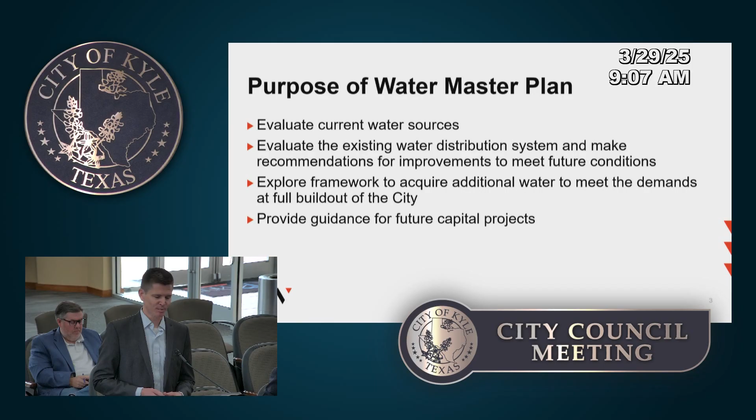So as part of this project, our team evaluated the city's current water sources, evaluated the existing water distribution system, which led to recommendations for improvements to meet future conditions. Also explored the framework to acquire additional water to meet the demands of the city at future build-out. And then the final section of the Water Master Plan is to provide guidance on future capital projects.

Wanted to quickly summarize a project timeline. Our team received a notice to proceed in March of 2024, about a year ago, and there were several concurrent activities that took place over the last year. Our team developed a citywide hydraulic model to essentially mimic the city's water system. That included field calibration and coordination with city staff to make sure that the hydraulic model and the city system were operating in alignment so that we could accurately predict what was happening.

Worked with planning and development teams at the city for development of the water demand projections. We assessed current, planned, and potential future water supply sources. And that led to the development of a capital improvement plan and a water master plan. And that draft document is what was included in the council materials today. So today we'll be walking through the general evaluation and findings that are included in that draft report.

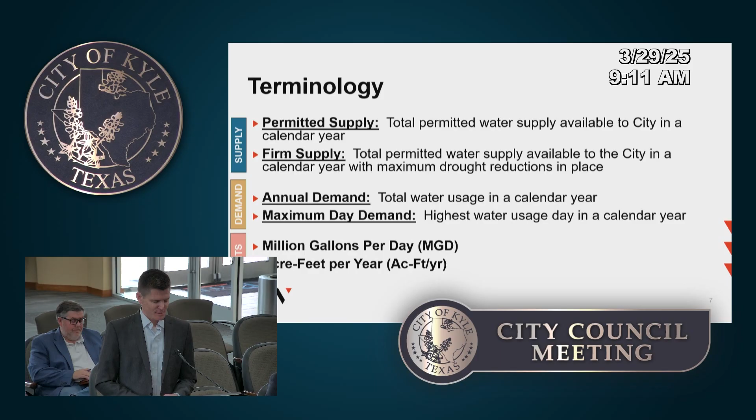Next, the units. We'll be mostly focusing in this presentation on million gallons per day. There's also a unit of acre feet per year. This is a common unit that's used in water supply planning and water permits, but for the purposes of consistency, we'll be looking at annual and max day throughout the presentation in terms of million gallons per day, or MGD.

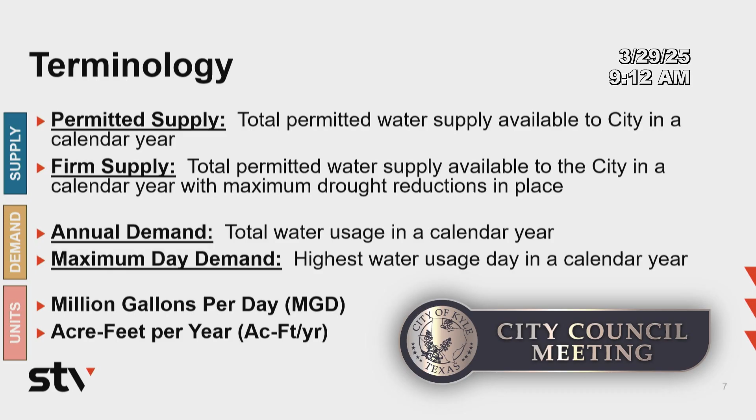In just over a month, I believe early May, the ARWA Alliance Phase 1B project is scheduled to be online. That project will deliver an additional 1.73 million gallons per day of firm supply. Then as additional phases of the Alliance project come online, anticipated Phase 1C, 1D project in 2027, as well as the Phase 2 project in 2032.

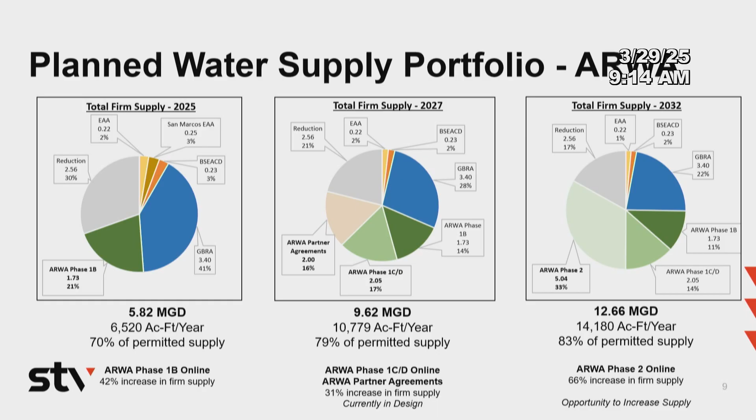Over time, in 2027, the firm supply increases to 9.62 million gallons per day, and in 2032 increases again to 12.66 million gallons per day. One important thing to note as these pie charts progress is as more Alliance supply comes online for the city of Kyle, the amount of potential drought reduction decreases.

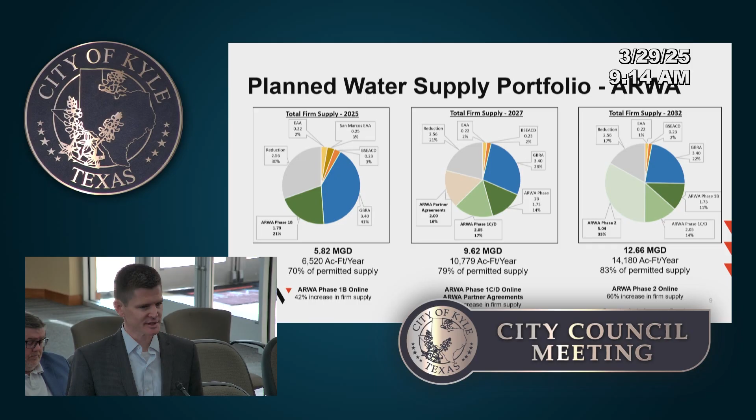And so the firm supply as a percentage of the city's total permitted supply gets larger, which is a big benefit in a drought condition.

Can you explain why that is? Why does the firm supply from Alliance Water not have drought issues, potentially causing it to be reduced in a drought period?

Yeah, the Carrizo Wilcox is considered a drought resilient supply. The Edwards Aquifer is very prone to water movement, which makes it more prone to drought. The Carrizo Wilcox Aquifer is deeper and confined in an area that isn't subjected to as much influence from the weather, the rainfall. And so for that reason, that water source doesn't have drought restrictions like the other surface water and groundwater sources.

So next, we'll just provide a snapshot of each of the water supply sources. The Edwards Aquifer permit permits the operation of wells number 1, 2, 3, and 5. This permit allows up to 432 acre-feet per year, or just under 0.4 million gallons per day.

The important thing about this permit is it's based on a calendar year, and so when that water is used is completely up to the city. And so that's a benefit during hotter summer months, so you can essentially save that water for when you need it most. But this source does allow up to 44% reduction, and that's directly based on the aquifer levels of the San Antonio pool of the Edwards. And then just as a point of reference, this supply is currently in stage 4.

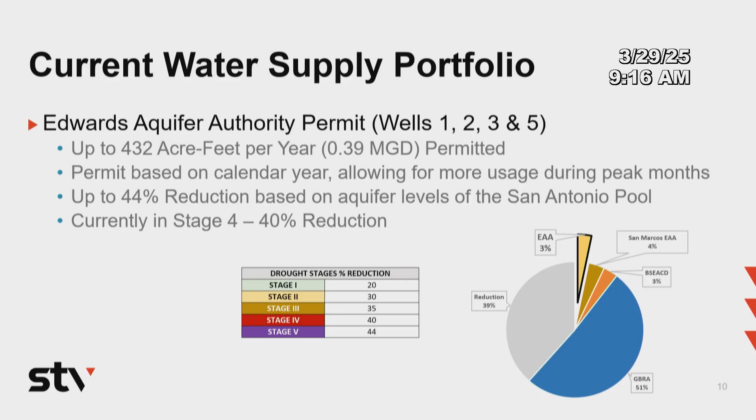Next, the Barton Springs Edwards Aquifer Conservation District. This is the source of water for the city's well number 4. This source provides up to 0.96 million gallons per day of permitted supply. There is a potential for up to 76.4% total reduction. This permit is based on monthly allocations, which allows for more water to be taken in July and August compared to January and February. As a point of reference, this supply is currently in stage 3, or 53.8% total reduction.

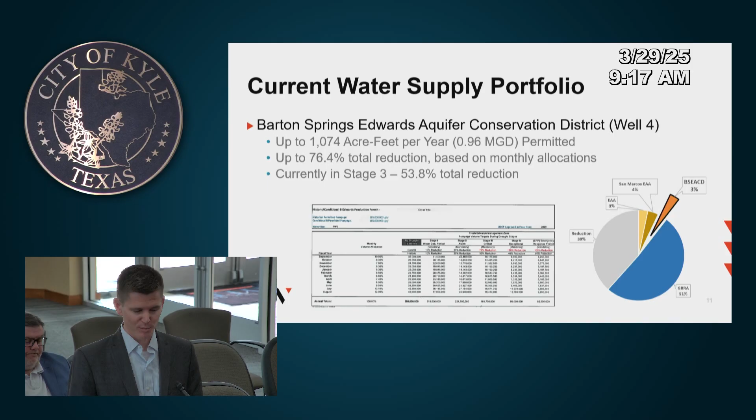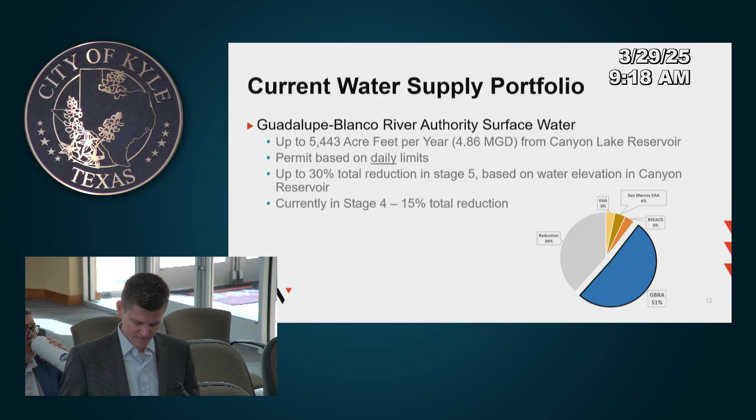Next, and currently the city's largest water supply, is from Canyon Lake through GBRA. This source provides up to 4.86 million gallons per day. This supply is based on daily limits, so that 4.86 is what's allowed every day, whether it's January or August. This permit currently allows for a reduction of up to 30%, directly based on the water elevation in the Canyon Reservoir. As a reference, this water supply is currently at 15% total reduction. The combined total of all these current reductions brings the city's current supply as of today to 5.07 MGD.

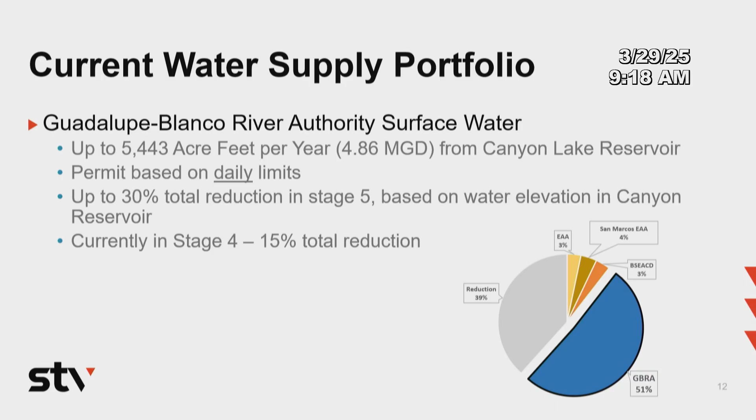Next, the city currently has two agreements in place with the city of San Marcos. One is the Edwards Aquifer Authority agreement allowing up to 500 acre-feet per year, in place through 2026. There's also currently an interconnect agreement allowing up to 500,000 gallons per day if needed for peak flows. This requires specific coordination between the cities, and San Marcos would need to agree in advance. For that reason, we don't include this supply as one of the city's annual water supply permits in the portfolio.

Next, a summary of the phases of the Alliance project. This is a significant part of the city's planned water supply. The Phase 1B project will add 1.73 million gallons per day. Phase 1C1D is 2.05, and Phase 2 is 5.04 MGD, for a total of 8.8 MGD. As referenced on the previous slide, the current firm supply is just over 4 MGD, so this represents a significant increase to the overall supply portfolio.

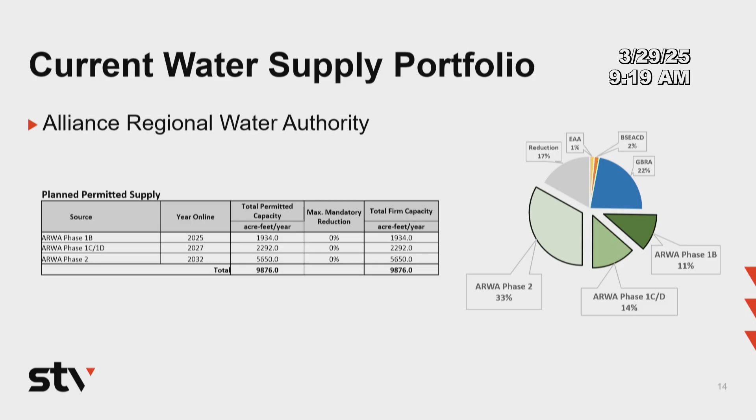In addition to the contracts the city currently has as part of the Alliance program, the city is currently in discussions with Alliance partners for near-term water agreements for additional supply. One of the great benefits of the Alliance program is that the infrastructure is in place, allowing agreements like this to share or transfer water as needed. There is one of these agreements on the agenda for today's meeting, as agenda item number 4, for some short-term water through Green Valley. For the purposes of this study, we assumed that through this partnering, the city of Kyle would potentially be adding 1 million gallons per day in 2026 and 2 MGD from 2027 to 2031.

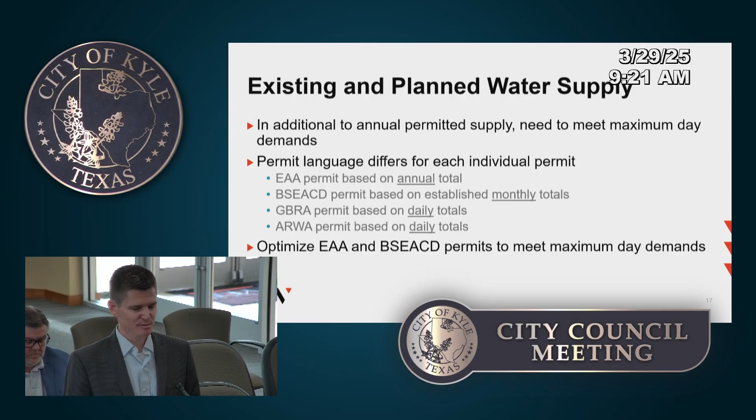So that was a look at the annual permitted supply. As mentioned, we also looked at the maximum day demand. Some permits only allow a daily amount to be drawn, whether it's the low demand period or the high demand period. Other permits, like the groundwater permits, allow more water to be used in the summertime versus the wintertime, which is to be optimized by the city to meet the max day demands.

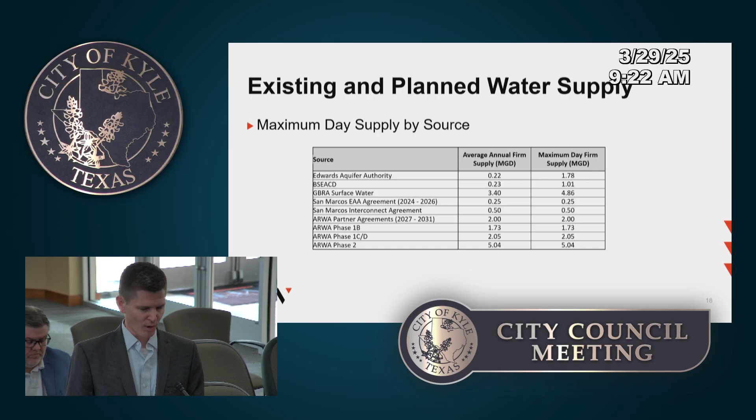This table is included in the report. It includes each supply's annual firm supply, as well as the max day firm supply. The top three - the Edwards Aquifer Authority, Barton Springs, and the GBRA - allow a little bit more to be taken during peak times. The end result for the maximum day demand is represented here on the chart, with the same sources. One thing to point out is how much more Edwards and Barton Springs water shows up at the bottom, compared to the average day where it's a sliver of the annual usage, but such a tremendous resource during the higher demand summer months.

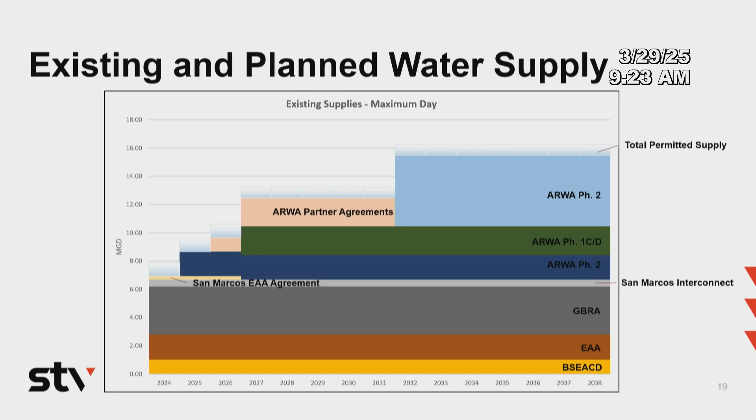Once our team established the current and planned water supply, we looked to the water demand projections to see how that compared. A couple of things to note: the City of Kyle's water service area, or CCN, which is the Certificate of Convenience and Necessity, is a permit issued by the Texas PUC that gives the City of Kyle the exclusive right to provide water within that geographical boundary.

There are portions of the city which are served by other water providers or included within other water providers' CCN. So I just wanted to clarify that when we talk about City of Kyle water, we're only talking about the area within the water CCN.

To develop the demand projections, we coordinated the development locations and growth rates through 2038, which was the time period that, through coordination with city planning and development teams, was felt to be a time frame that could be estimated on an annual, more detailed rate. Beyond that year, we used the Kyle 2030 Comprehensive Plan Future Land Use Map to establish the intended future land use of the remaining areas within the water CCN to establish full build-out.

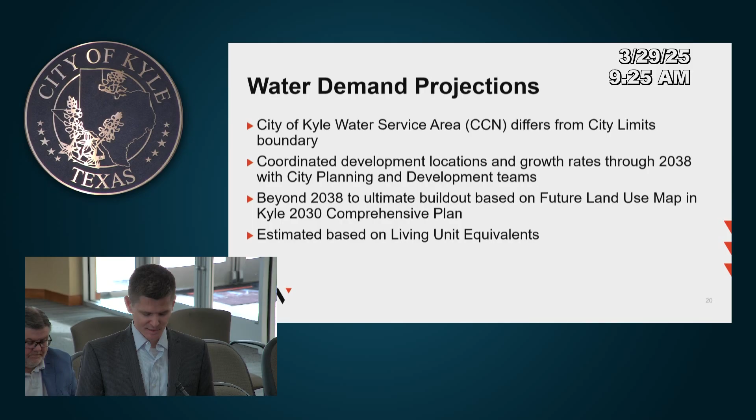Water demands are calculated based on a unit called a living unit equivalent, or LUE, and this is described in a little bit more detail on the next slide.

A LUE, or living unit equivalent, is the unit that we use in water planning for the development of water projections. All developments within the city are converted to the equivalent of the estimated water use of one single family home, which is assumed to include 3 people. Based on historical data and coordination with the city utility team, the water usage per LUE was determined to be an average of 270 gallons per day.

Through coordination with the planning and development groups, we projected the future units, converted those units to LUEs, and converted the LUEs to gallon per minute, or GPM, water demand. Included here is just one example for a development that is projected to require 1,000 LUEs. At 270 gallons per day, 1,000 LUEs would result in 270,000 gallons per day, or 0.27 MGD.

Also, based on historical data within the city's water demand usage, the maximum day demand, which is again the peak usage day out of a calendar year, was established at 1.69 times the average day demand.

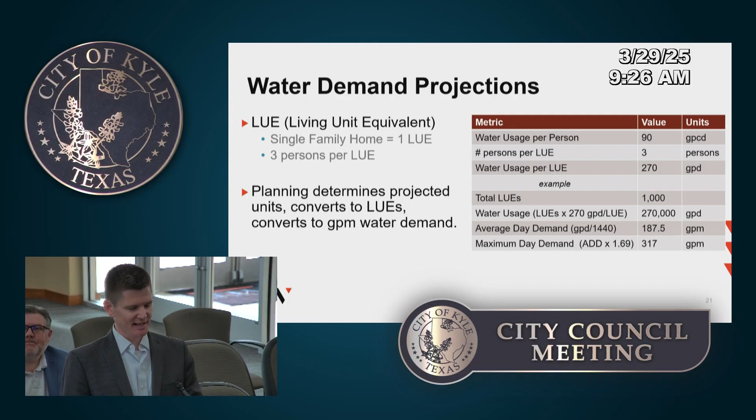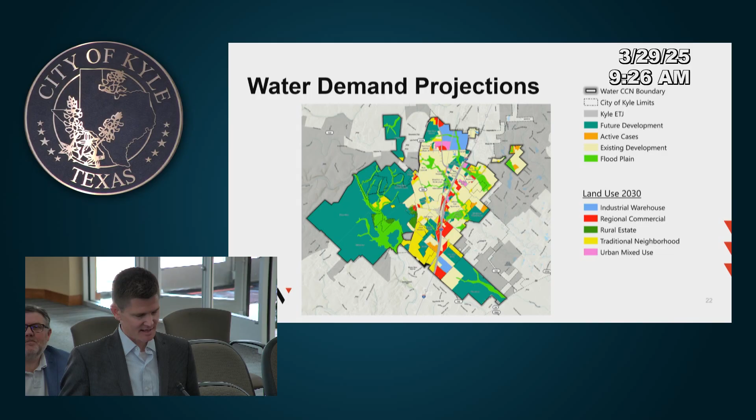This map provides a kind of snapshot of the process to getting to the estimate of full build-out of the city's water CCN. The bold boundary identifies that water CCN boundary. The gray shaded area identifies the City of Kyle ETJ, and then there are some additional areas within the City of Kyle limits which are not included in the bold shape.

The different colors: the light green represents the floodplain, which was removed from the demand projections based on the floodplain being undevelopable. The dark green and the orange are the future development and active development cases that were coordinated in detail with the planning and development groups. The tan color is the existing development within the city. And the color scheme under the Land Use 2030 title in the legend represents the remaining infill development, utilizing estimated LUEs per acre based on land use from the comprehensive plan.

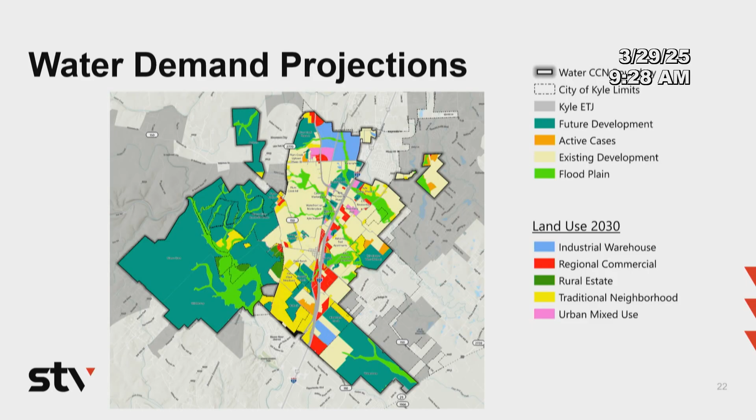A summary of the resulting growth rates: from 2024 to 2028, a growth rate of 9% was established. The next 5 years, 8.25%, and the following 5 years, 8%. Based on those known developments, that gets the City of Kyle's water CCN to about 80% build-out. At that time, the growth rate tapers down a little bit, which is typical as the city grows, to a 3% growth rate over the next 5 years, then 2% growth rate through 2048. At that time, the city, based on these water demand projections, would reach build-out.

One thing I want to mention before going to the next slide: the actual usage from 2024, the average day demand was 4.1 MGD, and the max day demand was 5.66. I mention this because that includes the current conservation that's in place, and that resulted in roughly a 20% reduction in average day demand and a 30% reduction in maximum day demand.

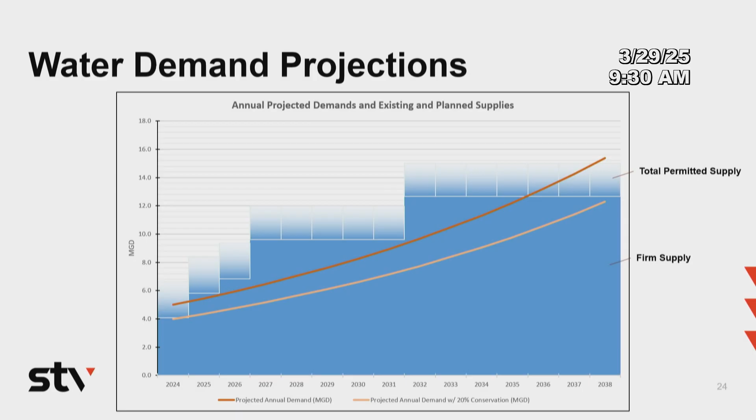One note on the two demand lines: the top darker maroon line is the straight-line projected annual demand based on historical usage within the city. The lighter orange line includes a 20% conservation.

That generally matches what was reviewed in 2024. The intent of this is really to show a demand spectrum. Various conservation measures can be put into place, with a spectrum of goals. So the purpose of showing the two lines is to show the firm supply as well as a spectrum of demands based on future conservation goals that can be set.

Before going on to the next slide, the observation here is that based on these projections, the annual projected demands and annual supplies appear adequate to 2035.

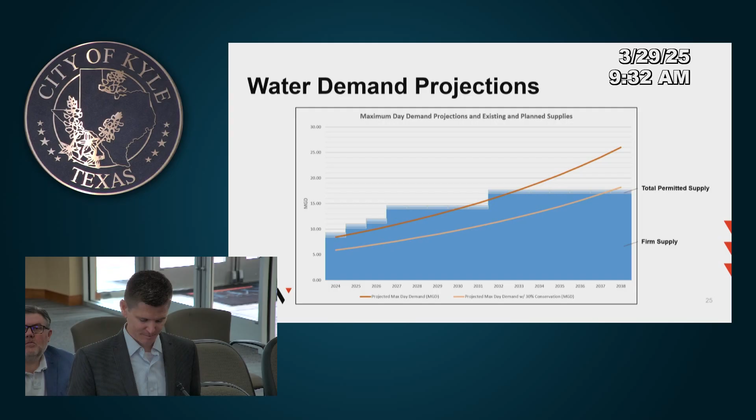The key takeaways from that section: based on the current and planned water supply strategies and demand projections, the City of Kyle has adequate annual water supply for the next 10 years.

We recommend a plan for additional operational strategies to be in place by 2030 to manage projected maximum day demands, to meet some of those gaps from the previous slide, which can be done without new water supply permits. And then plan for an additional water supply to be online by 2034.

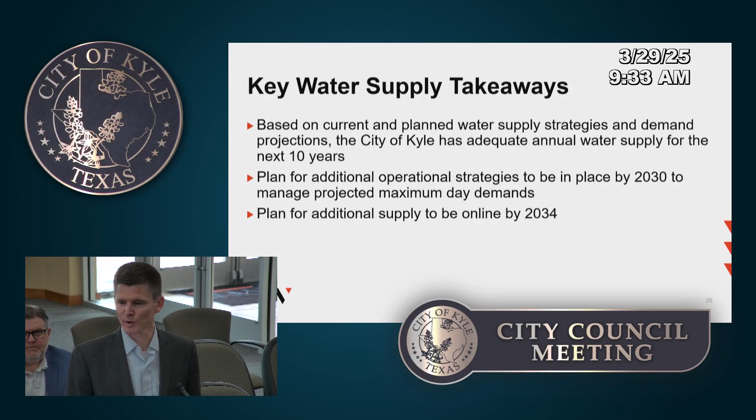Next, we're going to get into the future water supply planning strategies. Before we do that, wanted to see if this was a time to pause and see if there's any questions on the current status of the water supply and demands.

Yes. The estimates on ARWA, does that include, pardon me, do we have an estimate of the long-term capacity for ARWA built into these? I mean, not just how much we're contracted for, but what the ARWA long-term capacity is. Is that built into your estimates? Yes.

Just my question would be, with the ARWA aquifer, is that being managed with other cities also tapping into it as they're growing? Like everything that's coming online in the different phases. But do we have adequate planning to not dry down that aquifer, as other cities are also building at the same time and growing with the same growth rates?

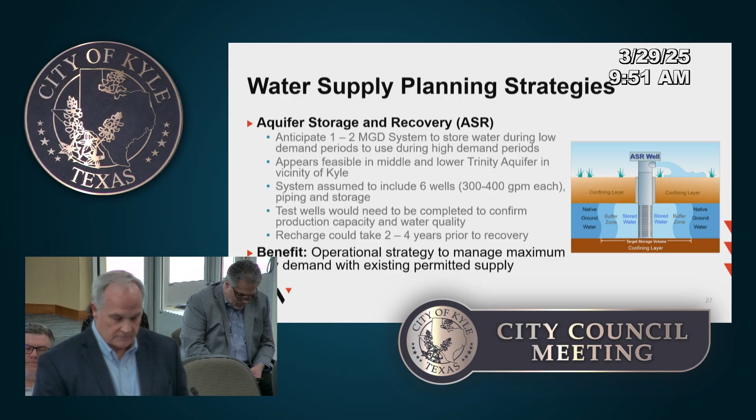I had a quick question, sir. I'm not a technical expert on this, but isn't there a policy where if you pump a gallon of water, you have to replace that same gallon? Isn't that part of the water regulation, so you can't just pump?

Right. And then there's an expensive cost to pumping, just so we're aware. So you have to own the water to be able to inject it in the first place - that becomes your water. The SAWS permit, the one I'm most familiar with, is basically one for one: you put in a gallon, you can pump out a gallon, regardless of the water quality, okay? If you take more than that, you have to have your own permit to be able to extract that from the aquifer. So yes, you can't pump what you don't own and what you stored there - what you don't own, you're not allowed to grab. Now, if you want to pursue the same aquifer and pursue permits in that, certainly that can be part of your water plan.

I just want to make sure it's clear what we're discussing: if you look on a total annual basis for water, we have sufficient water to meet the demand. It's the timing of when we need the water. Those summer months, when we have max daily demands, are the moments where we need additional supplies. So it would be existing treated water going into the aquifer, and then we'd be pulling it out. To Councilmember Zuniga's point, you couldn't take out more than you've put in, obviously. But it would be water we already own, just managing the timing of when we get that water out based on our needs. Hopefully that makes sense. It's a bit of a new concept for us to be thinking about. I just want to make sure that was clear.

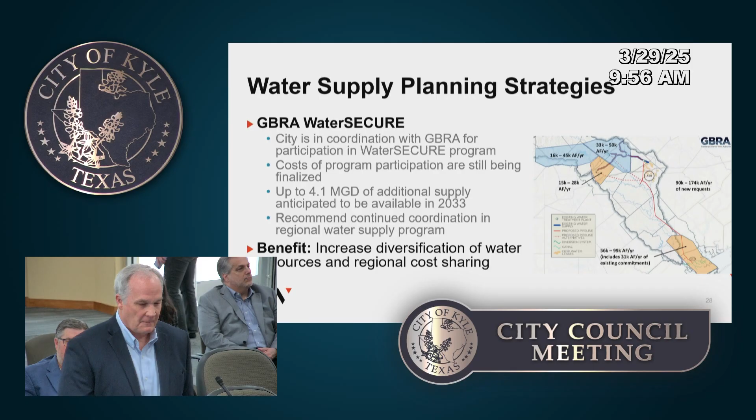You've completed a water reuse initial plan, looking at using your treated wastewater effluent. But at least at this time, you don't have a lot of users for that. Typical users are irrigation, golf courses, maybe large cooling towers, potentially dual-plumbed office buildings, that type of thing. Right now there's not too much of that here, so there's not a lot of demand. It doesn't make sense to build a huge distribution system because there aren't users for it. Those systems really require an anchor tenant to use the water and develop the line, and then you can connect other folks to it. This concept is taking that treated wastewater effluent - I want to make sure you understand that water is again highly treated. It starts as wastewater, but ends up being a very high quality water product.

It's discharged to the environment and goes down the stream, and you lose the rights to that water after you discharge it. This direct potable reuse, indirect potable reuse concept would take that water, starting as a very high quality water, provide additional treatment through microfiltration and RO and additional disinfection, and then use that water as your drinking water source. Ideally there's a buffer, a lake or large reservoir that it's pumped into. Obviously water quality is of utmost importance, but it's a concept already in place in Texas.

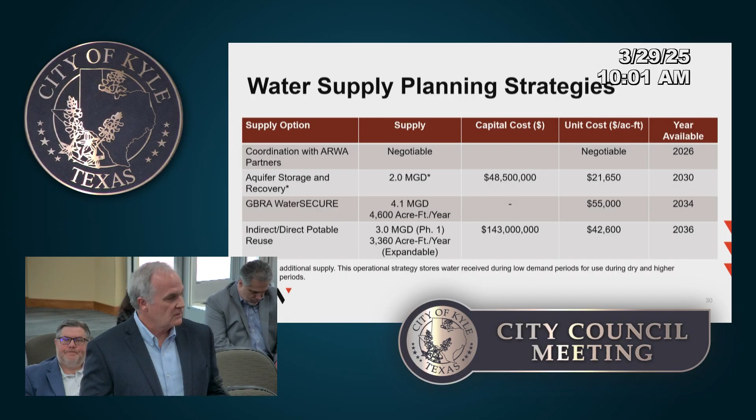Indirect potable reuse is shown at 2036. It does take a fair amount of time to pilot that—there are some public concerns that would need to be addressed, and it requires a very high level of treatment, so that's going to take a little while to implement. Looking at layering in those additional sources on top of what Ryan's already presented is shown here. One thing we talked about is that we have a different set of data for the projections through about 2038. When you get further and further out, it becomes a little bit uncertain what to plan for.

Again, we'll continue to work with you to understand what that planning horizon is and what the water supply is. We don't want to be caught short-handed with your water supply. So again, these are just an example of how those resources can fit into your overall portfolio and meet your demands.

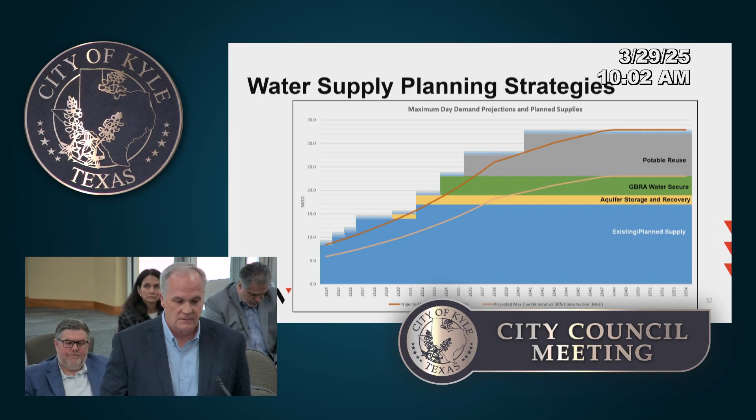The first graph was an annual basis. This one, we've got two conditions we need to meet - this is the maximum day demand. And on this one, we've added the aquifer storage and recovery - the ability to come in the future and use that facility to meet your short-term demand from that stored water that you have in the system.

So when I look at that potable section, it does look like there's a very large initial cost investment, but it does have a very sustainable return in reusing the water you already own, not dumping it back. It's already close, recycling and continuing it. So that'd be something I would just like to make clear, there's a very good sustainable reason to look at that. And I like that that's a very large chunk that for an indefinite period of time is going to continue to give us back that drinking water.

That is one of the great things about it - as your population grows, they use more water, but they produce more wastewater. The wastewater increases as your potential for water supply. So, yes, thank you.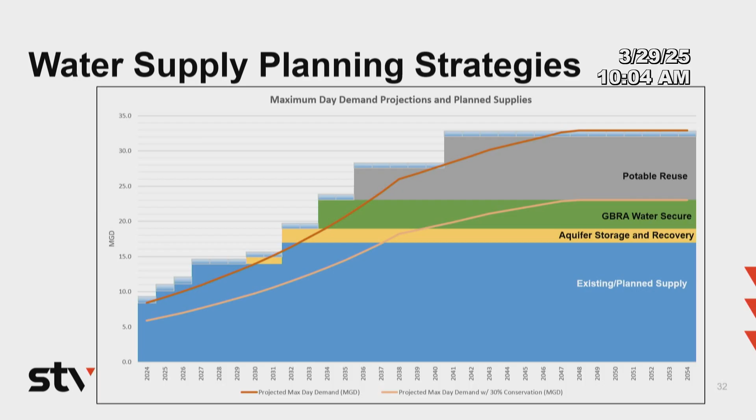Then, again, just wrapping up all the things that we talked about already. I think the overarching theme here is just the continued diligence in looking for opportunities for water for the city. And one of the things, as I've been involved in the water business for a very long time, is to maintain that openness. If somebody walks through the door with some water resources that they want to sell you, you have an opportunity - I'd really encourage you to take advantage.

You got the Green Valley opportunity that's working there. Water now is the new gold, okay? Extremely important, I wouldn't dismiss anything moving forward. Even with recycled water, if somebody comes in and wants 1 MGD of cooling water, you've got a source of water there. Take a look at what it takes to connect them, even though that's maybe not in your plan right now. So thank you very much.

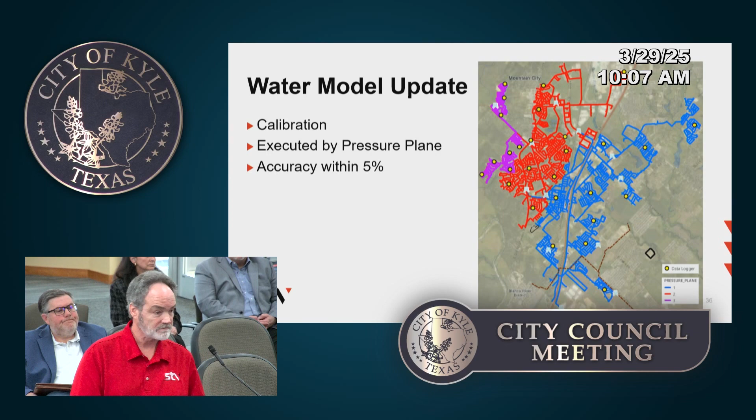Quick question - you might explain what a pressure plane is and why it's important to these models. Yeah, well, out in the system, you'll see elevated storage tanks across the city, and those are at a certain height.

The tanks need to be a certain height above the ground to give you pressure. As the ground goes up, the tanks need to be higher to give you that pressure. So a pressure plane just defines an area that's kind of similar elevation and has one set level for elevated storage tanks, and it gives a certain pressure across the whole system.

Even within that pressure plane, your pressures can vary. As you go up a hill, your pressures go down. As you go down the hill, your pressures go up. So if you live at the top of the hill, you're going to have lower pressure than your neighbor at the bottom of the hill. But you're going to be relatively close within a given pressure plane.

So all these pressure planes are isolated from one another. They have different pumps, different elevated storage tanks, and they operate independently. The way this works is your lowest elevations are on the east side of town, and as you go to the west, your elevations generally go up. So the second pressure plane, the red one, is higher - the elevations are higher, so your elevated storage tanks are higher. And when you get to the purple, again, it's another step higher.

So does that clear enough? Okay.

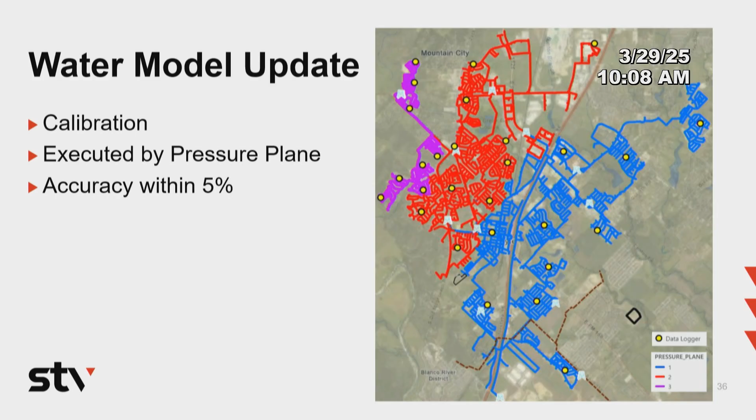So what we do after we develop the existing model to match the system, we just kind of evaluate the system. That's the first thing we did. We looked at the pipe diameters across the system - are they adequate, are there any that are too small. And you look at the velocity in the pipes to determine that.

We looked at the typical system pressures all across the system - are they within the typical range. Your minimum pressure by statute is 35 PSI. If you get below that, you're kind of in violation of TCEQ regulations, so you want to be above 35 PSI. Typically on the high end, at my house where I live, I've got 100 PSI, which is kind of high - I've seen as high as 100, 110. But typically you're going to be in the 60, 70, 80 PSI range for a typical system. Lowest would be 35 PSI.

So after we look at system pressures, we look at fire flow available. We run some scenarios in the model to see what the fire flow available at different hydrants are. You typically want to shoot for like 1,500 gallons per minute as a base - higher is better, lower would be a problem. We just kind of evaluate how the fire flow looks across the city, and if there are shortages, you can look at things to improve the system to increase that fire flow.

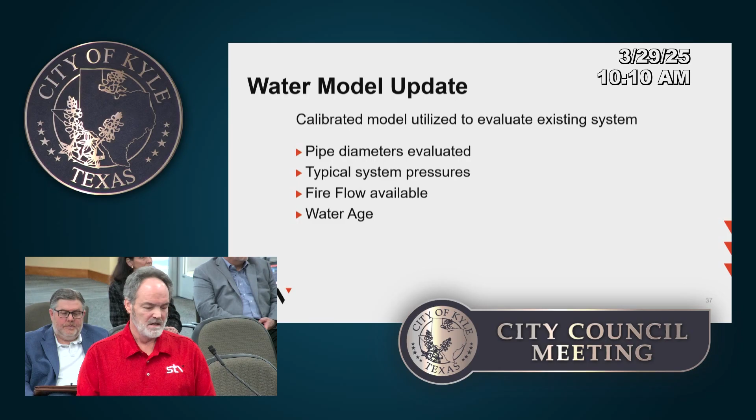Another thing is water age. Water age impacts your water quality. You take all the water pretty much currently on pressure plane 1 on the east side of the system, and you progressively pump it to the west. So as you go to the west, your water age gets older, and you have potential for water quality issues. So we use the model to see how long it takes the water to get from the east side to the west side and vice versa, and just kind of evaluate the water age and look if there's any potential improvements needed for that.

One thing we found from operating the model in existing conditions is if you increase demand a little bit from where it is today, there's a potential problem in pressure plane 1 between the elevated storage tank in the north and the one in the south. They should stay together as they rise and fall, but the one in the north is kind of isolated. You could have trouble maintaining pressure in the north while the south is fine, because there's no large diameter pipe connecting north and south on the east side of the city, so there's a bit of isolation between those two areas.

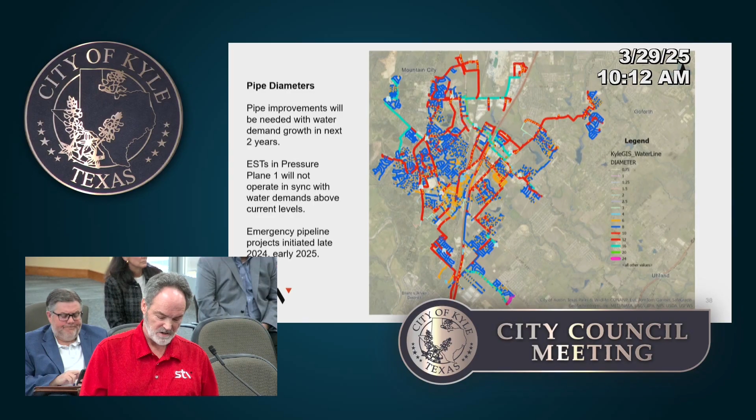Looking at system pressures, we looked at the worst case—the max day and also the peak hour. Within any given day you'll have certain hours, like in the evening when everyone's cooking and taking showers, where you get the peak, and it's quite a bit more than the max day amount. So that's the worst case scenario.

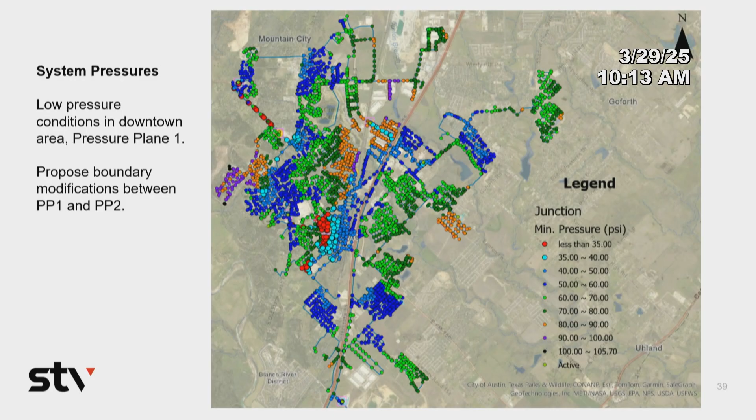This map shows the red areas, which are the places where, in worst case conditions, pressures could go below 35 PSI, the minimum I mentioned. That's mostly in the downtown area, almost where we are in this building—an area that typically has lower pressure for the whole city anyway. But if you got into a worst case scenario with peak hour demands, those pressures could drop below 35 PSI.

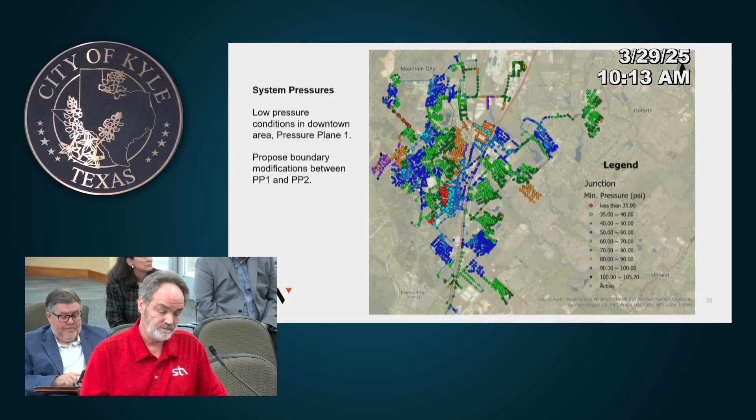That red area is currently in pressure plane 1, but if you converted it and put it into pressure plane 2, it would have higher pressure and you'd lose that low pressure situation. So that's another project spelled out and recommended in the master plan for future improvement.

After looking at and evaluating existing conditions, the next step was to look at the future. We already had the future demands mapped out, so we put those into the model and created a 2028 scenario, a 2038 scenario, and an ultimate scenario that had all the growth projections and demand improvements. We primarily focused on max day and peak hour demand—average day doesn't really control the system. The system capacity needs to be set so it can handle a maximum day and also the peak hour within that maximum day.

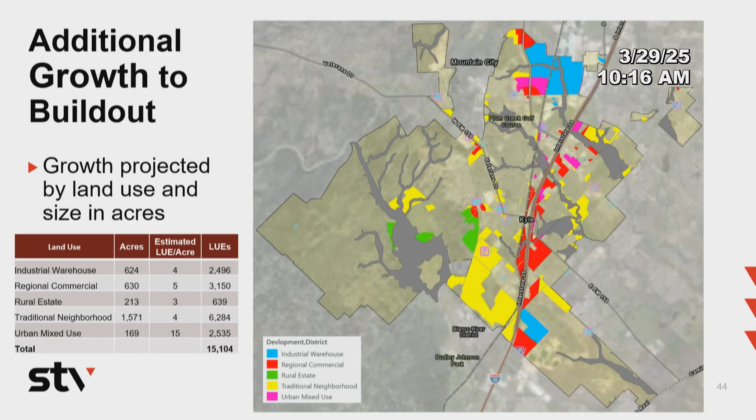Finally, this shows the CCN overall. All the colored areas in the middle are the land use areas Ryan mentioned earlier—we assigned water usage by land use, whether industrial, rural estate, or traditional neighborhood, and put LUEs and demands in the model based on that. You can see this is mostly infilling, not really expanding outward like the other development—more backfilling inside the city where piping already exists. So not much new piping is needed; you just need to make sure pump capacity and elevated storage tanks are adequate.

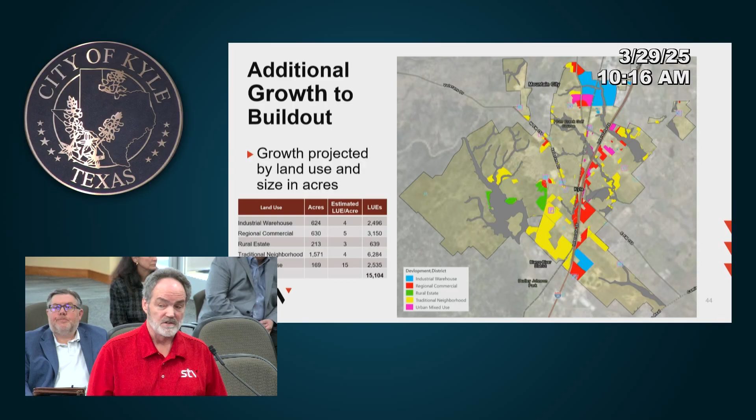You can see the total, there's 15,000 LUEs that are going to be added during that time period, and that's almost what the city is today. I think you're a little bit more than 15, maybe 18,000 LUEs. But just in that time period, the city as it exists today is going to be put in again in those colored areas.

So what has to happen to the system to make all that work? As we added those expansion areas and moved the distribution system out to cover all the new areas, what are the main system improvements needed to make sure the capacity is there so that as growth in population and water demand increases, your system can keep up with it?

We identified overall 16 projects for capital improvement plans, shown in this table. The first 12 would be needed in the first 5-year time period, and then 4 more in the 15-year time period. By the time we get to build out, it's not quite as perfectly defined—may not be a whole lot more piping projects, but there will be final expansions of pump stations, elevated storage tanks, and ground storage tanks, that kind of thing.

So what I'll do in the next few slides is take you through these projects so you can see what they look like.

In the first 5-year time frame, there are 12 projects. Three of those are already in construction—this is already ongoing. There's a Waterstone pump station, an elevated storage tank, and a Hoover elevated storage tank. The design's already been done on those, and they're in construction, and they'll be done in the next year or so. The next three after that are already planned for and going into design, and they'll be ready by 2028.

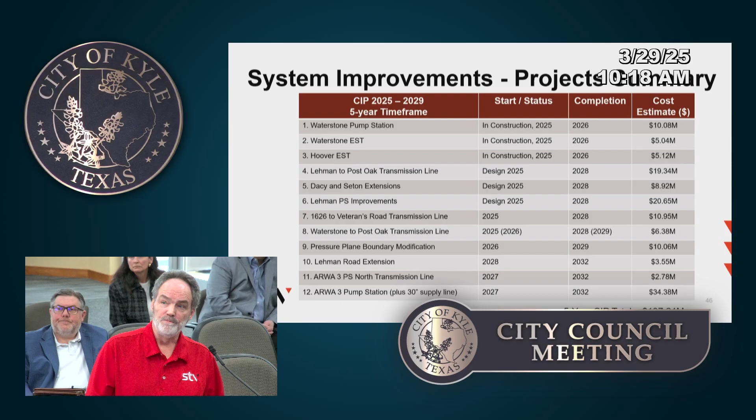Those include mainly pipeline extensions and a new pump station. Number 12 is a new pump station to receive all that additional Alliance water shown previously. That'll be in the southern part of the system, and it'll become a really important pump station as that future growth goes out to the west.

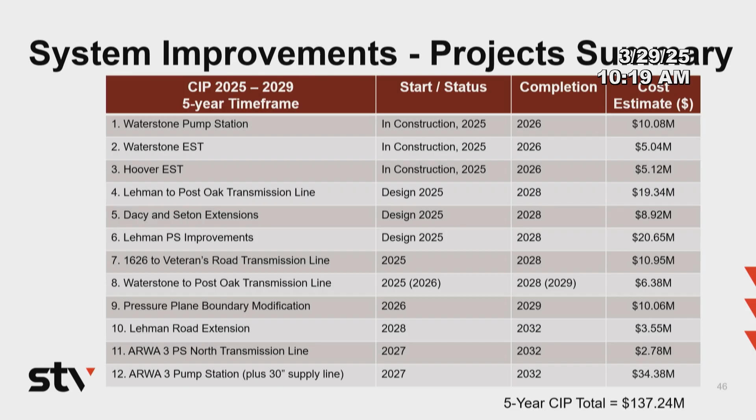This shows you on the map where the first 8 are, just kind of numbered. You've got the pump station and elevated storage tank for Waterstone down in the south, and way up in the north, you've got the Hoover elevated storage tank.

Number 4 and number 8 are really a result—they're already in progress as far as starting the design, or at least number 4 is. Those were brought in because of the problem with the elevated storage tanks in the near future where they won't be able to stay synchronized, and you'll have kind of a bottleneck between the north and south of that pressure plane. Number 4 really solves that issue, and you'll see it's out on the edge of the CCN.

Originally, the first thought was just to go through the existing piping—there's a 12-inch line that goes through neighborhoods from north to south, and we thought we'd just expand that. But then we got into all the construction inconveniences to the city, so we found a better alternative to tearing up roads and putting in a new pipeline to replace an old one. We went out on the edge of the CCN boundary and took a pipeline from north to south, and that solves the problem with water flow between north and south.

Number 6 up there is a pump station that's already in design—that's the Lehman Pump Station. It's being redesigned and expanded.

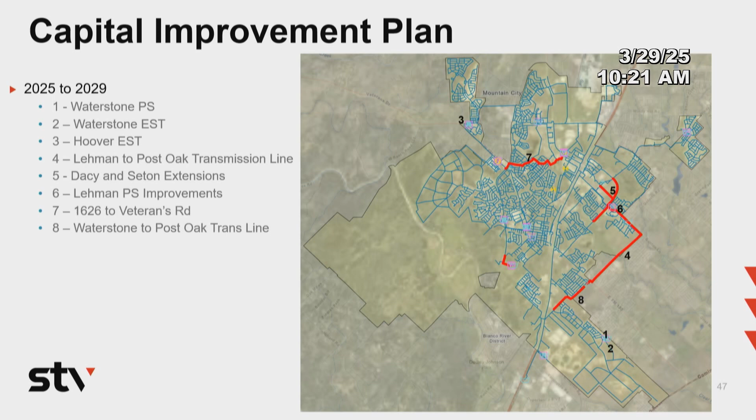Number 5, north of that, involves getting some pipelines between that pump station and the Dacy Lane elevated storage tank, to complete that flow of water from the pump station to the elevated storage tank. I'll go on to number 9—that CIP project is the pressure plane modification I mentioned earlier.

We want to take the downtown area that has some of the lowest pressures, and especially as water demands increase, that pressure is going to become more of an issue. We'll move it into pressure plane 2. To do that, additional piping needs to be done, shown on the right. All the red lines are additional piping that would be put in place to create that new pressure plane boundary and move that part of town from pressure plane 1 to pressure plane 2.

The final projects for the 5-year time period are numbers 10, 11, 12. Number 10 up north is just the Lehman Road extension, completing a loop from piping that was put in previously. Numbers 11 and 12 are the pump station to receive the Alliance water and the pipe connecting it up to the southern part of pressure plane 2.

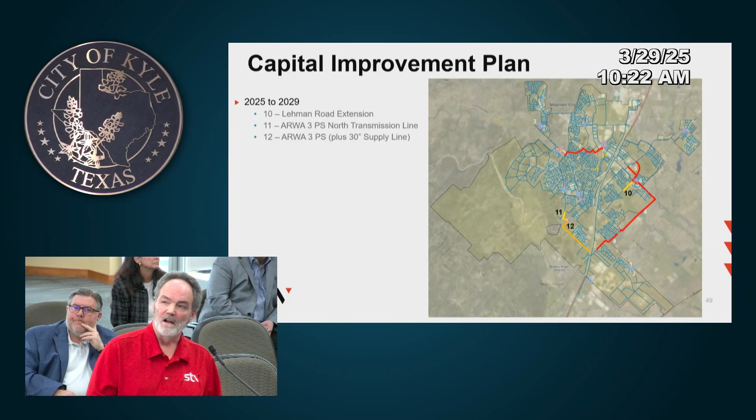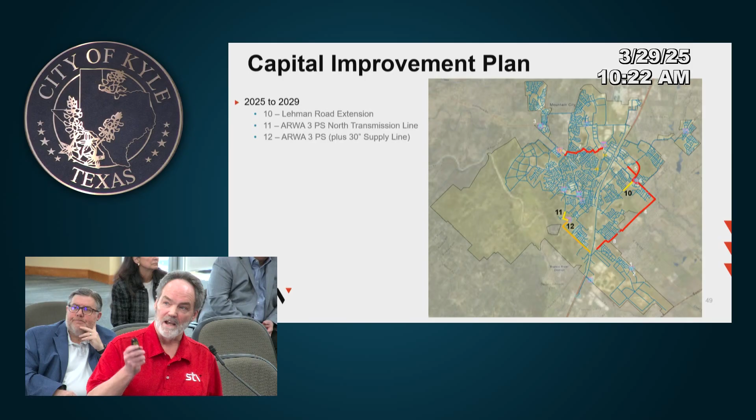That yellow-orange line, number 12, is actually the feed line that comes off the Alliance pipeline supply line, getting water from the Alliance pipeline to the pump station. The exact location of the pump station is variable. There was a lot identified where it's shown on the map, that may not be the final place chosen, but it'll be somewhere in that area. That doesn't matter as far as the modeling goes—the piping might be a little longer or shorter, but the results would be the same.

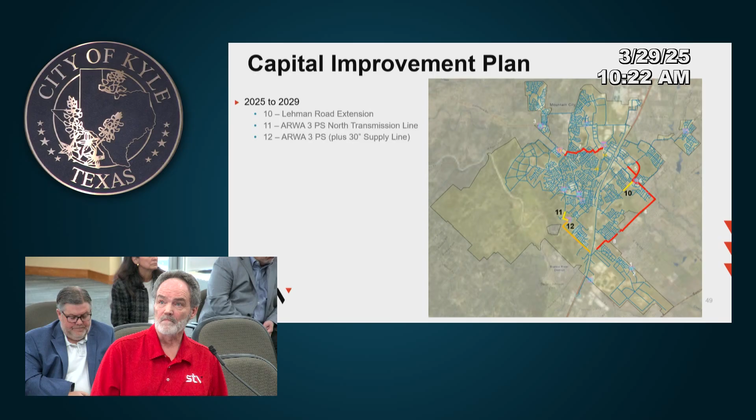So those are the CIP projects for that first 5-year time period. Beyond that, growth continues, and to get to the 2038 timeframe there are 4 more projects that need to be done. This doesn't include all of the distribution piping that has to be put into neighborhoods as they're developed—this covers the main projects that'll feed water to those areas.

Number 13 is the Nance Tract, an area out on the far west. It's a large tract. There'll be a transmission line, a 24-inch line, going from the Alliance pump station out to the west quite some distance, and it'll feed the whole area out there. At the end of it, there'll be an elevated storage tank, which we're calling the Nance Tract elevated storage tank.

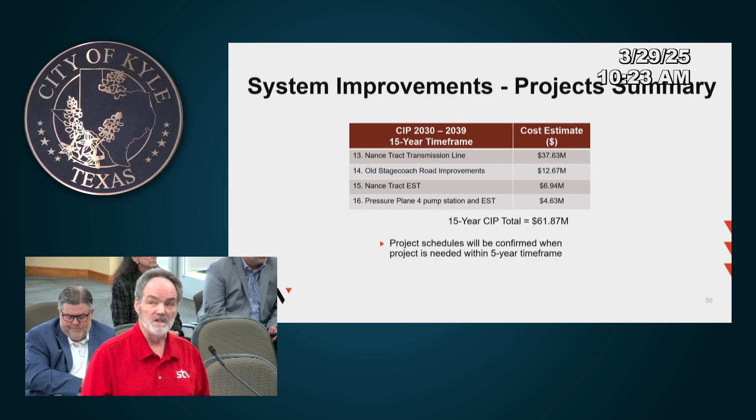Old Stagecoach Road currently has a 12-inch line from north to south. That's insufficient for future growth, and it will have to be improved to a 16-inch line. That one might be a little painful because you are going to have to cut some roads and cause some inconvenience, but it does need to improve from 12-inch to 16-inch for this time period.

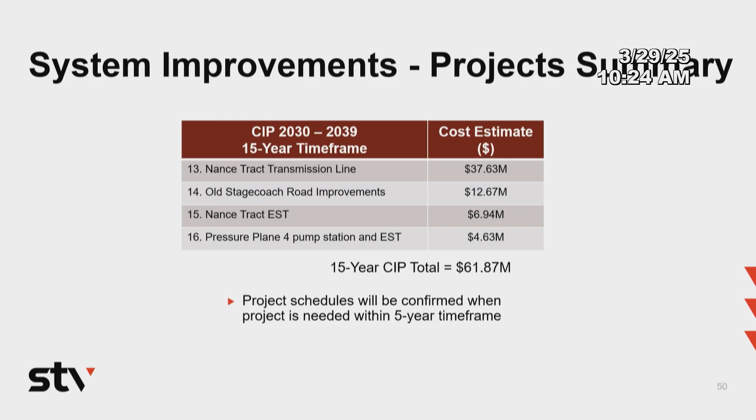There's also a part, which I'll show you on the map, out to the far west of the new areas where the elevations really go up—they jump up quite a bit. As I talked about pressure planes previously, the pressure plane established out there is not going to be sufficient. We're going to have to raise the elevated storage tank out there and have a small area that we're calling a fourth pressure plane, out on the western edge. I'll show you a picture of that when we get to it.

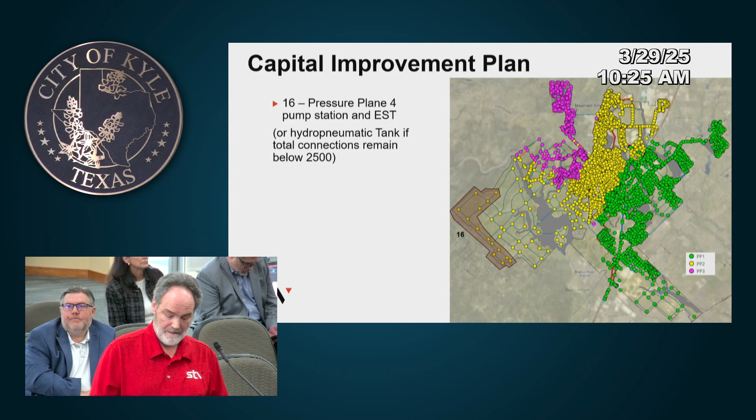In summary, this shows the existing system with the larger diameter pipe shown. The yellow lines are all those pipeline projects we showed and how they fit in. The cyan color represents 16-inch existing lines, and the yellows are the proposed 24-inch and 16-inch lines. You can see how it completes the flow from north to south on both sides of the highway, both sides of town. These new projects will link things from north to south so you can get sufficient water flow from one pump station to different areas.

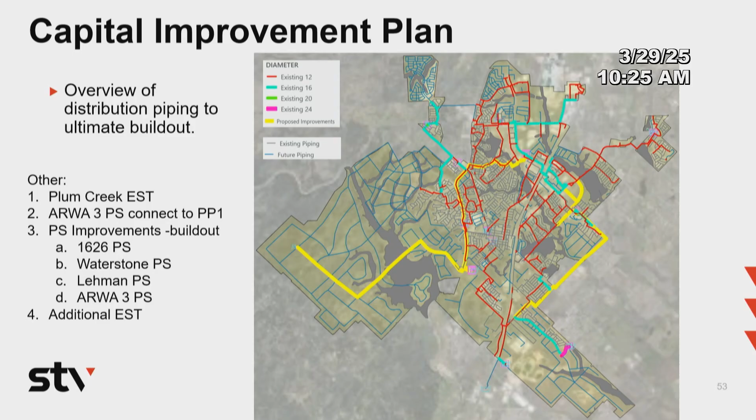And that just kind of shows you an overview of where all those improvements were. And just to summarize all those, this is kind of a similar table as before.

In the 5-year time frame, we've got 31 developments that will have significant population growth, and there's 12 capital improvement projects that will need to be completed to make sure the system has the capacity to deliver that water. The total estimated cost for all of those at this point is $137 million. When you look at the master plan, there's detailed sheets that have detail about each one of those projects, so you can see what each one is estimated to cost.

When you get to the 15-year time frame, the last of those 36 planned developments are going to be completely built out to 100%, and you'll need these additional 4 capital improvement projects to make sure the capacity of the system is adequate. The estimated cost on those is almost $62 million.

And then beyond that, as we showed before, all the growth from that point is going to be back towards the interior of the city. So we don't need a whole lot more pipelines and whatnot, but what we will need is to finish build out of the pump stations and their ground storage tanks. And we'll need an additional elevated storage tank. We haven't identified the location for that yet—that's kind of far out there in the future. That'll be looked at closer when we do updates to this. And at some point, the Plum Creek elevated storage tank, which is existing, that will need to be replaced, either where it is or nearby a different location. But that'll be something that needs to be done as well.

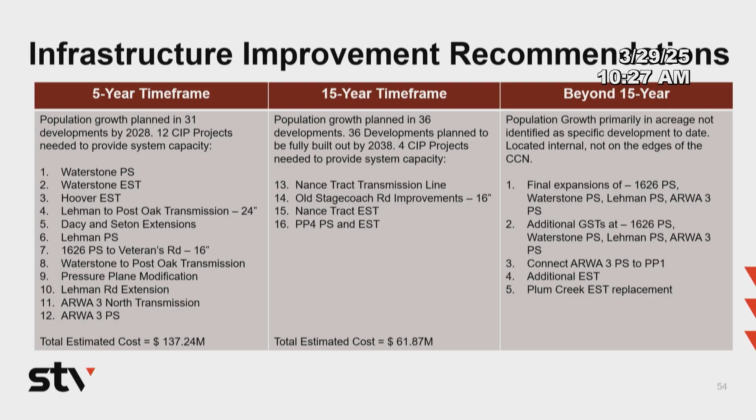What I talk more about is getting the capital improvement projects identified and getting those into the 5-year CIP. Of course, we had $130-some-odd million there for those capital improvement projects, and there's a potential for looking at federal and state funding to help maybe fund some of those projects.

And then this, we looked at as best we can today, looking at how it is now and what the projections are. But these demand projections need to be updated yearly or on some schedule, because what we thought was going to happen this year, next year something may have changed, and maybe the growth is a little bit different, it's in a little bit different area, or maybe the numbers are faster or slower or in a different area. Those kinds of things need to be considered. So this is not a static plan—this has to be a dynamic plan that gets updated.

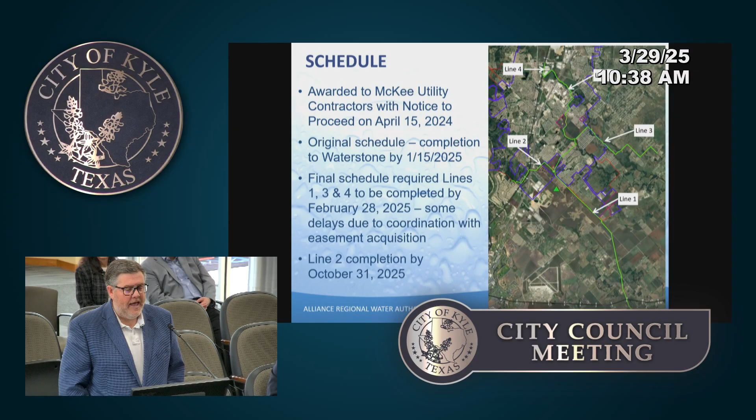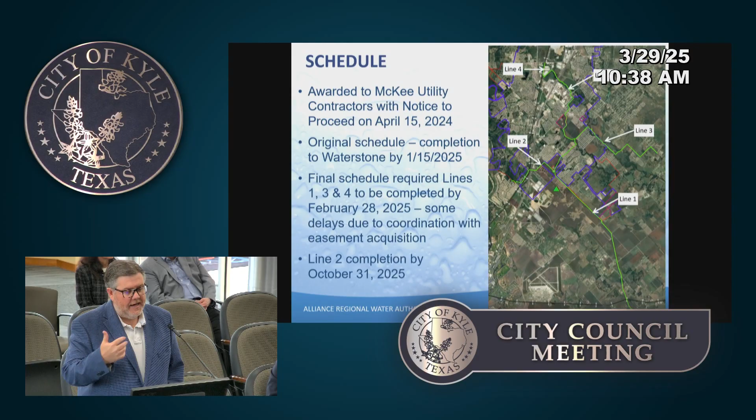As a reminder, on our Segment C, where we started initially, it was awarded to McKee Utility Contractors just shy of a year ago in April of 2024. Originally, when going out to bid, we anticipated having the segment up to the Waterstone development completed by mid-January 2025. As a result of requests from the city to expedite things further, we issued an addendum and revised that schedule to make sure we finished lines 1, 3, and 4 - you can see those on the map, that's the bulk of the line work - having that completed by February 28th, 2025.

Unfortunately, we've hit a few delays in some of that work, and I'll go into that in more detail. We're slightly behind schedule, but we're making progress. Line 2 will be completed by Halloween of this year. We did upsize a portion of that line to get across I-35 based on the agreement we had last summer with the city of Kyle, which will allow the future Phase 3 extension referenced in STV to get that water to the west.

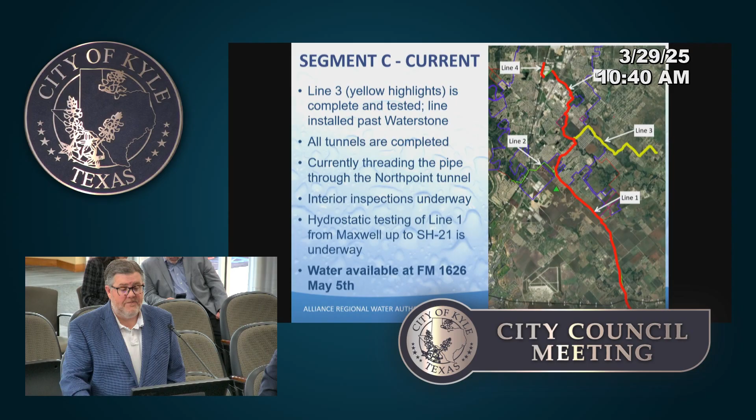They've started filling the line for hydrostatic testing, and we've made a slight change. We initially were only going to fill up to SH21 from Maxwell. We've revised that and are now filling all the way up to FM 150 initially for testing, and that testing will actively commence next week, then they'll continue filling further north. We are on track for water to be available at the City of Kyle's FM 1626 pump station on May 5th.

Graham, I have a couple of questions on that. You said that the delay from February to May had to do with Northpoint easement acquisition? That was a large part of it, yes, sir.

So we had been working for a few years along with the city who was trying to get easements, and initially were told that was going to be done by donations, and we kept trying to work through that process and getting delays. Ultimately, we ended up making a financial offer to Northpoint Development, which they accepted, and so we closed on that. But we did suffer some delays going through that process with them.

Okay, but I don't think the city council ever got the opportunity to determine whether that was worth the multi-months delay because it was the critical path to delivery. So how did the decision get made to knowingly delay and continue pursuing various options for easement acquisition when obviously this is the most critical project in city history, and timeliness is of extreme importance? Why did that delay occur without us being able to decide whether that was appropriate?

Well, we were continuing to work with the acquisition team to try to get that acquired as quickly as possible. Our contact with Northpoint Development continued to assure us it was going to be done by donation, and he was working to get signatures, but it became clear that just was not happening, and that's when we pulled the trigger to make the financial offer to move that forward. At that point in time, we didn't feel that this portion of the project was going to be the critical path, the last remaining portion that had to be done.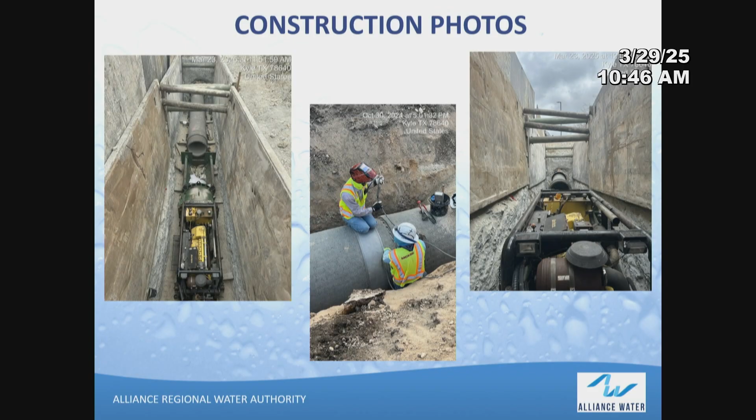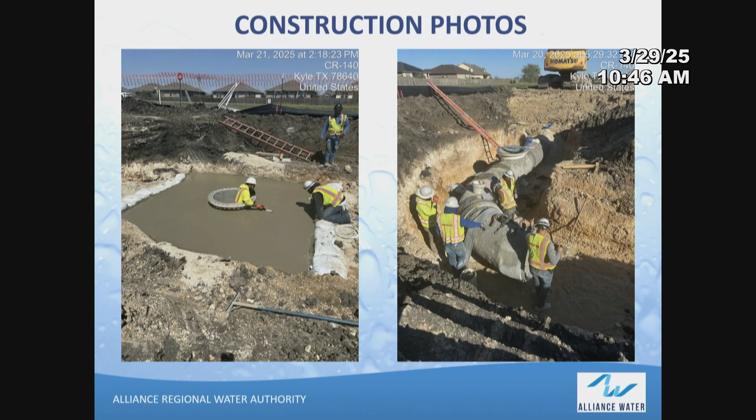And finally, just some of the other piping work that's ongoing and other appurtenances that they've got to complete in order for water to be received. So unless there are other questions on segment C, I was going to go into the water treatment plant and give you some updates there.

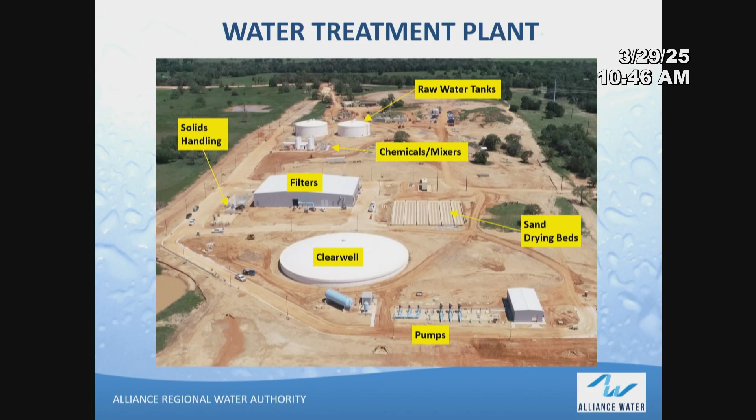We've had some challenges at our water treatment plant as well. This is our overall site—we start with raw water tanks on the high end and flow by gravity down through our chemical areas, filters into the clear well, and then pumps push that water out. From a treatment perspective, the plant is designed to remove both iron and manganese and condition the water to blend nicely with all of our customers' existing systems.

The EPA sets secondary standards for iron and manganese in potable water to prevent taste and odor issues. In addition, we set our own treatment goals to make the water more stable and non-corrosive so it blends well with the existing Edwards and Carrizo sources our customers have. All of the water leaving the treatment plant to date meets these standards and goals—we're in full compliance with EPA and TCEQ standards as well as our own goals. However, we have been receiving much higher iron levels from the wells than was anticipated in the design.

So what problems does this iron cause? For one, it reduces the filter run times before they have to be backwashed and cleaned. The initial design had filter run times of 24 to 30 hours before backwashing, but based on actual iron loading, those run times are as low as 6 hours during higher iron level timeframes.

The net effect is less treated water coming out of the plant. The design flow rate in total was 19.5 million gallons per day. They're currently operating at about 4.5 million gallons per day, but only on a reduced 12-hour operation time frame. They can and will increase that time frame as we get closer to summer.

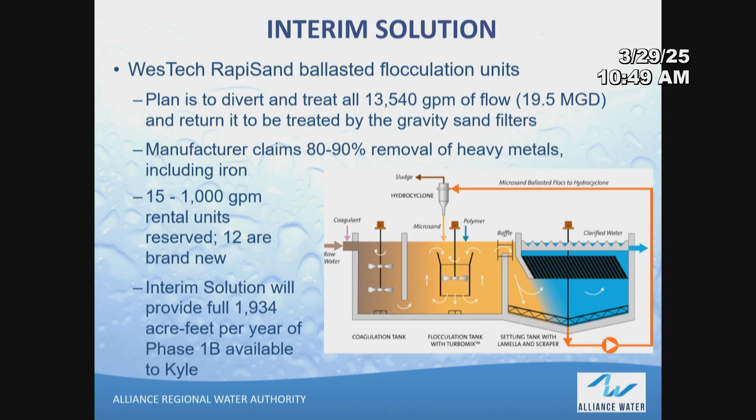So these are the units that we have selected. The plan is to treat and divert all of the flow, 19.5 MGD, through these temporary units. They have demonstrated that they can remove 80 to 90% of the heavy metals, including iron. We would put those units between where we add our chemicals and prior to our gravity sand filters to remove that iron, then return that water to the filter system and continue through the process.

We have located 15 of those units. They were each 1,000 gallons per minute, on a rental basis. 12 of them are brand new, 3 have been only utilized in potable water in the past and would be allocated to the site.

And just to be clear, this interim solution would provide the full 1,934 acre feet per year of Phase 1B water available to Kyle. So it would restore the full capacity that Kyle had in the 1B. When did you say this would come online?

So by June 30th is the contractual date that this will be online. We have incentives, in fact I was going to touch on that in a minute. We have some incentives for the contractor to beat that performance by either mid-June, or even greater incentives if they complete it by May 31st.

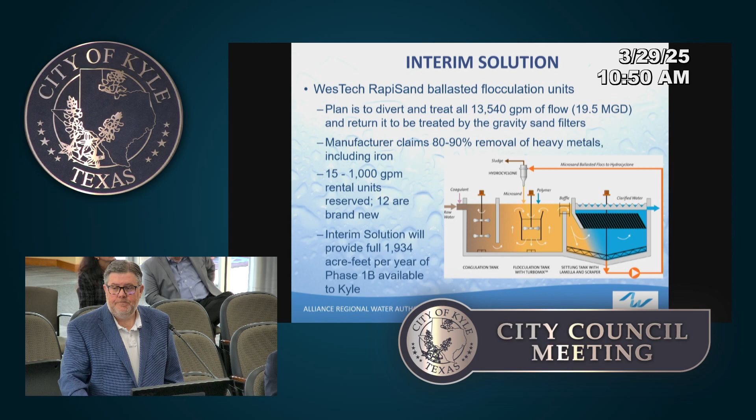So this is another reason February was never an option, because let's assume that the pipeline is completed and we're connected and the water is on. Right now, how much is available to us because of the shortened capacity due to iron issues? It'd be about a third of Kyle's commitment, which is about half MGD.

All right, so it's a third. What we have right now, when this pipe is done, is a third of what we're supposed to get, and we're waiting on this iron issue to be resolved until we're actually going to get the full amount. That's correct.

Number one, how is it that we were so far off on our iron estimations? And at what point did we become aware that we were going to be critically low on the ability to actually produce water from the headworks? So it was in early November of last year when we really determined that the iron issues were causing reduced capacity.

We had some brand new plants starting up. They were working through some of the chemical additions to try and determine what the situation was. And they narrowed it down, the operations team narrowed it down that the iron levels influent to the plant were higher than what the design intent was of the plant.

So was it initially projected that there just wouldn't be this much iron? How is it that we missed that projection so much? Yeah, so the design engineer created the design basis report and evaluated the region for the amount of iron that would be anticipated as part of their design that had to be taken care of in the treatment process.

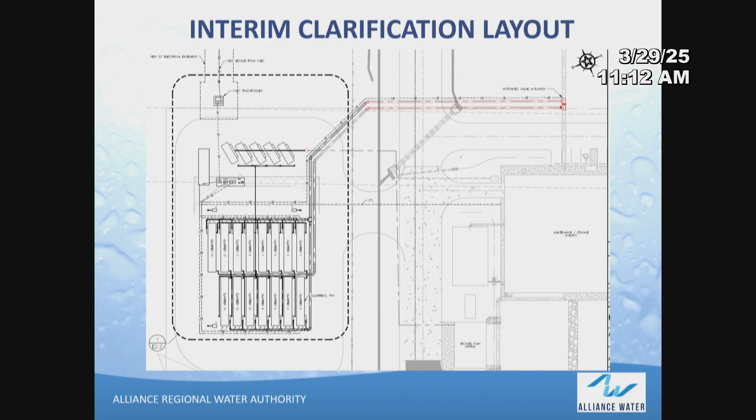So there'll be two separate solutions. The interim solution, which is hard to see on screen, is laid out downstream of our mixing basins where we add chemicals, but before it goes into our current gravity sand filters. We'll pull the water off to the side and run it through these 15 ballasted flocculator units that will remove the iron, then take the water that comes out and return it back almost to the same location, continuing down through the gravity sand filters.

We're pulling off some reject that comes from those flocculators, which we'll dewater and try to keep in cycle as much as possible so we're not just disposing of that water. That water then goes back through the rest of the regular treatment process — gravity sand filtration, then we add chlorine, and it goes into our clear well, and ultimately through the high service pump stations and out to the system. So it just pulls it off to a side stream, removes the additional iron level, and returns it back.

In terms of a permanent solution, we're reviewing about 5 or 6 different technologies. It will, in all likelihood, be some type of standalone clarifier or plate settler system, again in that same general location between where we add the chemicals and the rapid mix and the filtration, to remove the additional iron required before it gets into the filters.

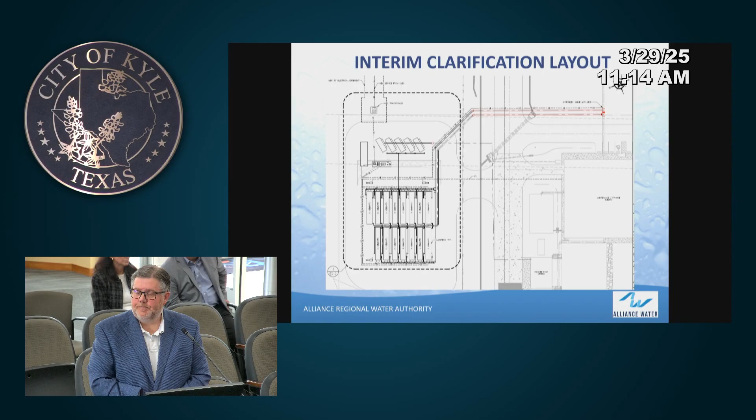So given that we don't yet know what that permanent solution will entail, do we have the quantity of filters we need in order to operate for the time being?

Yes, so these 15 filters will allow us to treat the full flow of the 1B plant. The 19.5 MGD can all be diverted and sent to these filters, this interim solution, to remove that additional iron. So this will restore the full capacity of the plant.

We've also set this in a location that will not be the permanent location for the additional clarification required, so that we can build that permanent clarification in place. Once that's online, we'll remove the interim solution. That will take us from 33% all the way up to 100% of our allotment of phase 1 — this interim solution will, yes.

And how many additional filters do we have if, God forbid, something were to happen to one of them? So this has one additional unit. At peak flow, we'd have 14 active units, and then one would be a backup unit.

Based on discussions with other partners in the system, including those contracted through GBRA, it's clear they do not intend or need to use all of their flow in the next year or two. So I don't anticipate we'd actually be at the full 19.5 MGD of flow. In actuality, I think we'd have 3 to 4 to 5 of those units available if we have 1 or 2 down for service. But if we were at peak flow for a number of days at 19.5 MGD, it would take 14 of those units, and we'd have 15 on site.

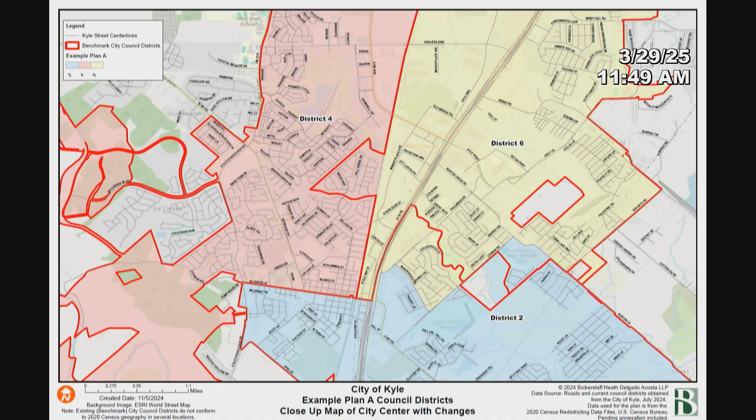Hold on, Sherry, you're gonna have to pull the map up. Yeah, she's working on it right now. I think that's as much as we can zoom here. Well, if y'all have other discussions while she's getting that pulled up, we can continue the dialogue on any other issues or items you want.

My speculation is it's a connection point - it's just a road, and the property on either side is in the ETJ. Yeah, but our council member who represents that district lives right there. We know where he lives, he's plotted on the map. So is that the concern? That and I'm just wanting to see it for myself - I've been told that his district is not changing, but every time I see that map, it looks like it got looped into District 4, and I just want to see evidence that it didn't.

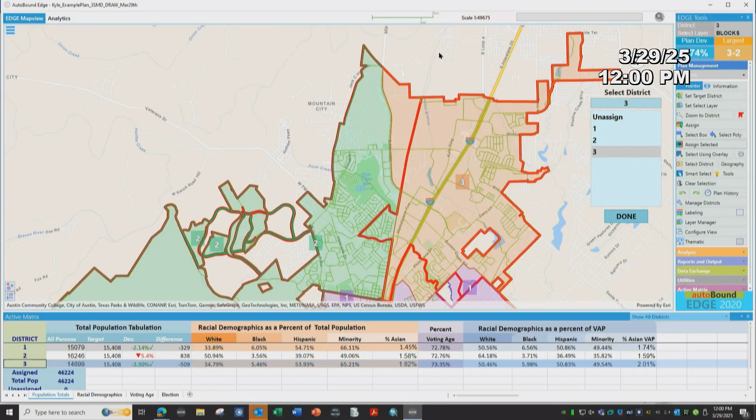And then what if we expanded District 4 into the commercial areas where District 6 goes way down west of I-35? Maybe we make all of that District 4 up to, we could start with Marketplace and see what that might look like.

So, but doesn't that make District 4 more populous? Well, I guess it's not the residential. I don't know how much residential there is. There's a little bit, but I don't know if that's significant.

Because District 4 already has all the way up to the rail line, which is the Tenorio subdivision there. So really, everything we're talking about is commercial. It's predominantly commercial. Well, I kind of agree with Zena.

Marketplace would be there, and that senior complex across from Target is there, so there'll be some commercial in that area, and some residential in that area.

I agree with Zuniga that I like the idea of all three districts sharing in the downtown. That's a good point. I'm just saying if we were going to add so much commercial to District 6, basically District 6 has all the commercial outside of the downtown that we have. So in terms of the commercial valuation of the city, if we move it to 1626, pretty much all of our economic development from a commercial standpoint is within those boundaries. So I was thinking, well, we have that particular area that was just highlighted. We could make that District 4, and that would add back some commercial value to District 4.

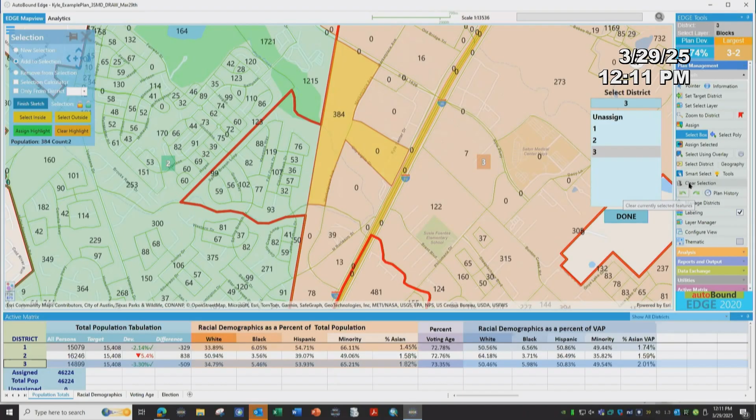And the blocks, as I mentioned in one of my earlier presentations, are sometimes just weirdly shaped. That block with all the population is really long, but I'm assuming the population is in a discrete section of it. If that was multiple blocks, it would be easier to adjust.

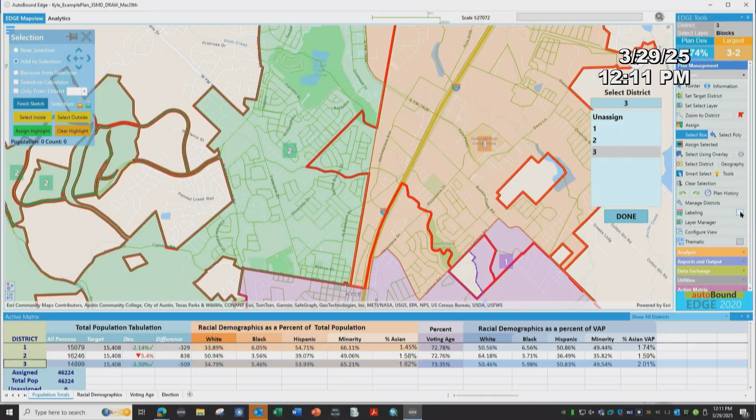Yeah, for District 4, I'm fine with that map. I do like having the neighborhoods be unified. I do think, between 2 and 6 at the bottom to the south, it looks like it splits a neighborhood.

Yeah, the boundary between 2 and 6 has always been confusing because 6 has all of Steeplechase Park, but I think District 2 has always felt like Steeplechase Park was part of their district. As long as 6 stays where it is, we can't really adjust 4 very much.

That's true, Mayor. You're closer to that area in District 2 than in 6. And since we are gonna be adding Lake Kensington, it might make sense to put Steeplechase Park wholly in District 2. Could we look at that, sir? See if you could give that area to 2 with the numbers?

We're about to start playing that game. I see there's a lot of population there.

See how oddly shaped that block is, the one you just highlighted in yellow? That's all one census block for reasons that don't make any sense, 'cause it completely wraps around the other part of the neighborhood.

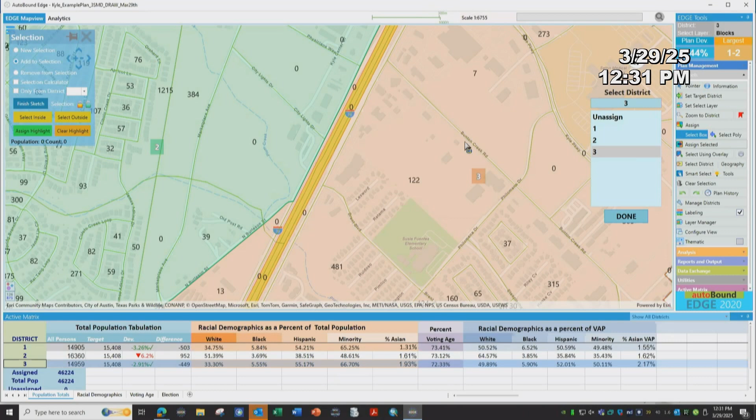All right, what do y'all think about that? Now we can zoom back out and look at it on the whole. Don't you have a very disproportionate color now in demographics? If this is real data, 51%, it's 2 Hispanic majority districts. I think they're all very Hispanic now, aren't they? No, just 2 of them. 6 and 2 are, but 4 is not.

The question is, would you rather have 2 Hispanic majority districts or just 1 in order to get more Hispanics into District 4? That's open-ended, I don't know the answer to that. I've heard people argue both sides. The starting point for us, the current map, you've got 2 Hispanic majority districts. So if we're gonna go away from that, we'd have to have a really good reason, and be very creative with the drawing of the map, given the census blocks. Yes.

Scroll in, just so we can kind of see, yeah, let's just see what it looks like. So voting age, the districts were pretty even, percentage-wise. That looks pretty clean, it's explainable.

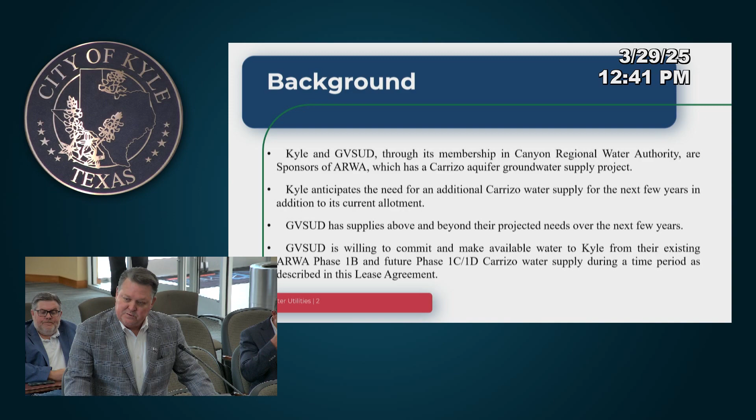As part of this deal, the 730 acre feet, 652,000 gallons per day, in addition to when Phase 1C and 1D Carrizo comes online, will add another 772,000 gallons per day, for a total of 1,545 acre feet per year, which is close to 1 million gallons of water for us that we don't currently have. We're scheduled to take delivery of the Carrizo water, Phase 1B, from ARWA just as soon as we sign this agreement, and that's going to be a really big deal.

So we add that to some of the water we're already working with ARWA and GBRA on, which is about 400 or 500,000 gallons of water per day. Add that to this, and it's going to make up the gap we're missing right now until ARWA comes online in June. We're already taking about 300 to 400,000 gallons a day right now through ARWA, going to our GBRA Alliance pumping site. I think that's probably pretty important to underscore.

So what you just said is that the gap, because of the iron production issue we're looking at between May and the end of June, this agreement is part of the City of Kyle's commitment to solving the iron issue, where we identified another party to take on their excess water that they don't need at this point, while also covering their costs for solving that iron issue, costs which we intend to recover through action, hopefully. Because of that, we're going to be able to make up that gap.